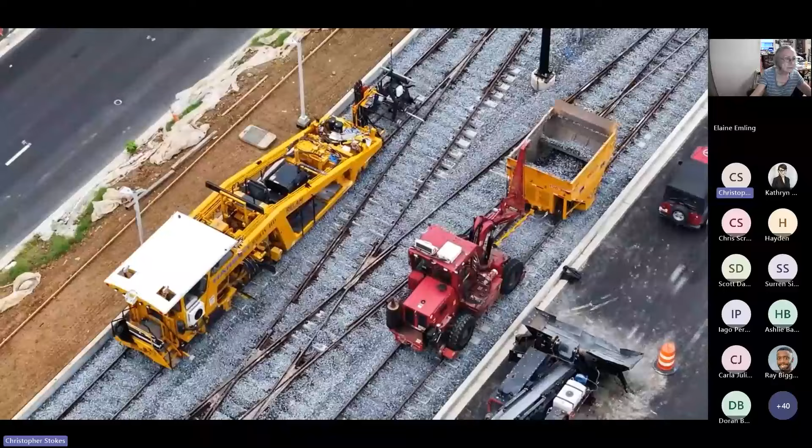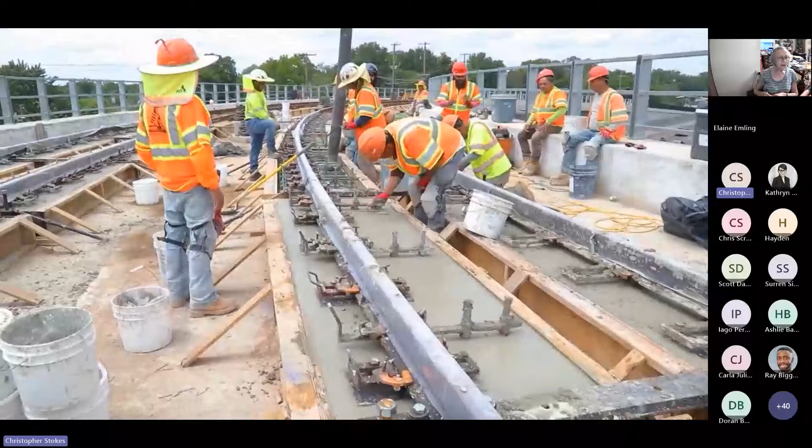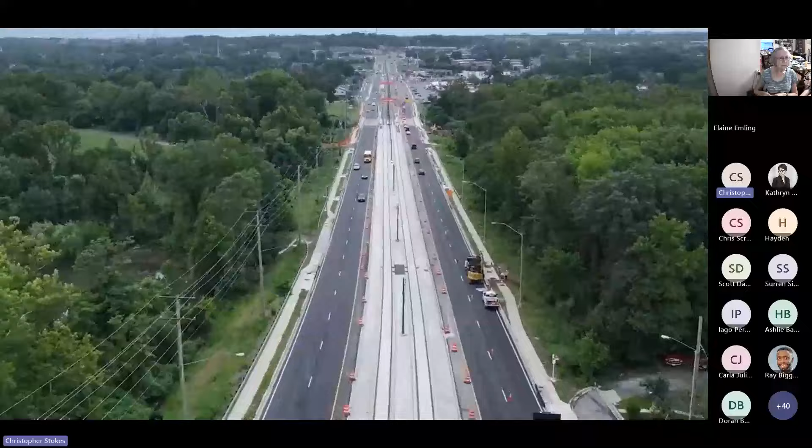It has truly been the year of transformation for the Purple Line project. With construction now more than 80% complete, the new Purple Line tracks tell the story. We are excited to share that tracks have been installed across all of Prince George's County, with more than 75% of tracks complete across the entire project.

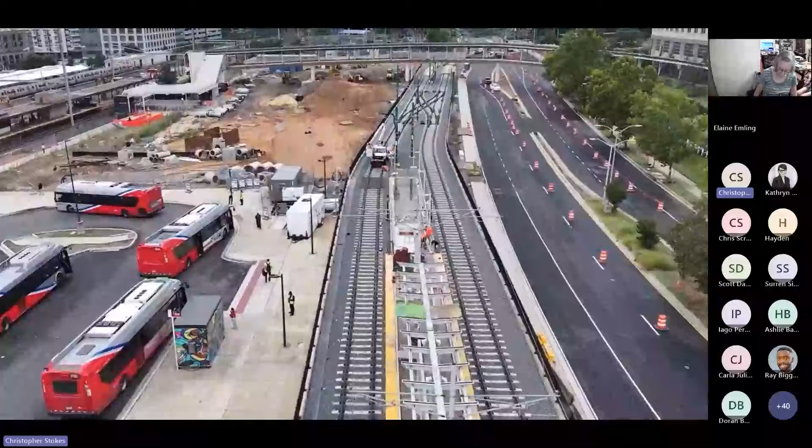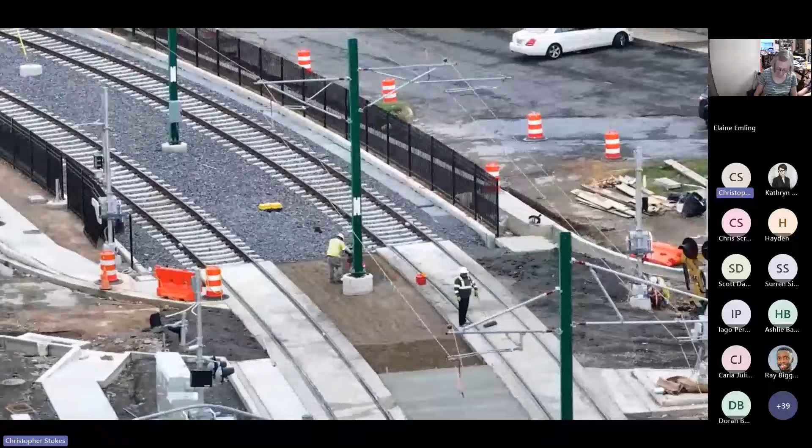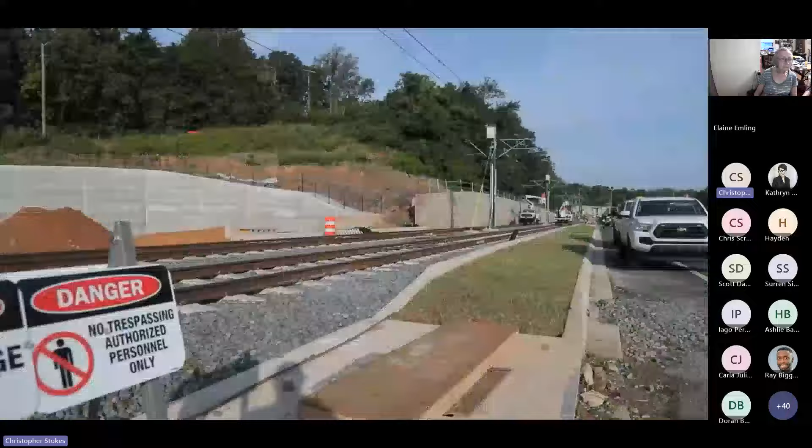Along with track installation, you have likely seen many overhead catenary system poles installed this year. These poles carry the wires that power the Purple Line. At the eastern end of the project, the poles and wires are not only installed, but have already been energized, ready to power up the light rail vehicles. Just a reminder, always assume light rail system power is on. And please be sure to avoid the Purple Line right-of-way areas. Only cross at designated areas and crosswalks, and be sure to look both ways before you cross.

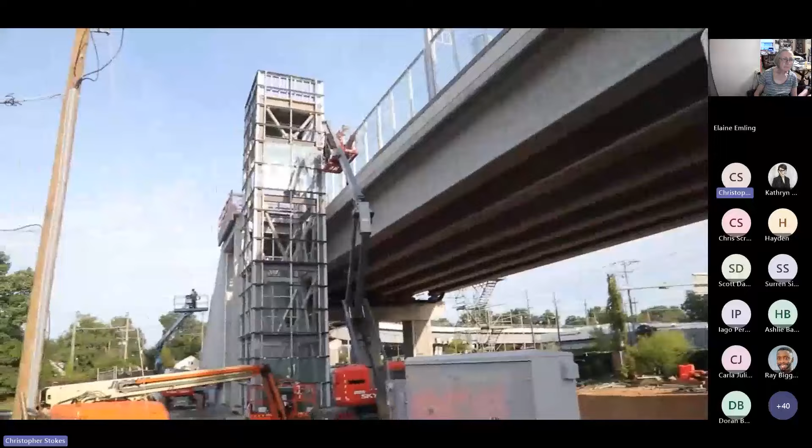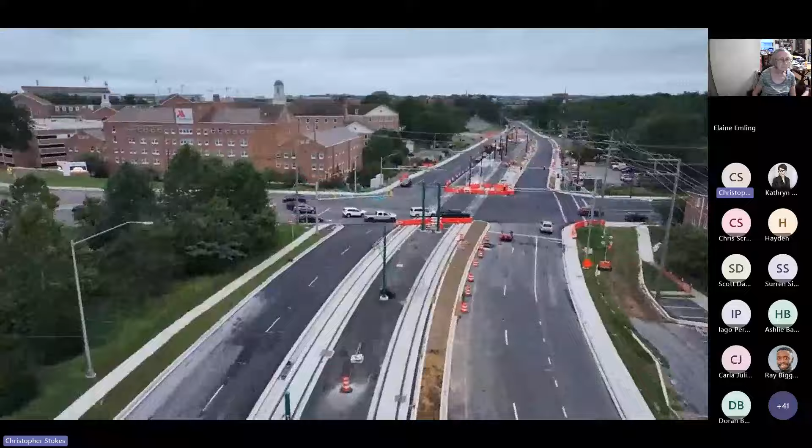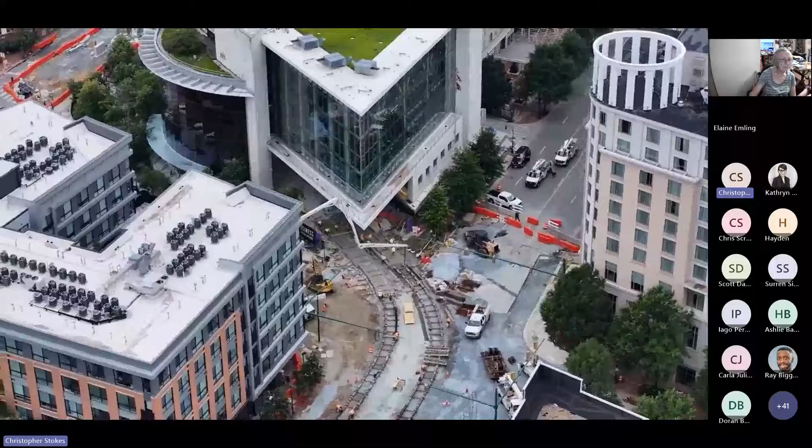Across the corridor, stations continue to progress. Canopies, benches, and Art-in-Transit installations are being added. Bronze spires in Riverdale, vibrant colors in Long Branch, and more to come. More than 20 roadway crossings that once required detours are now in their completed phase, including the complex intersection of Wayne Avenue and Fenton Street. With the tracks in place, Silver Spring residents can see the vision of a more connected community becoming reality.

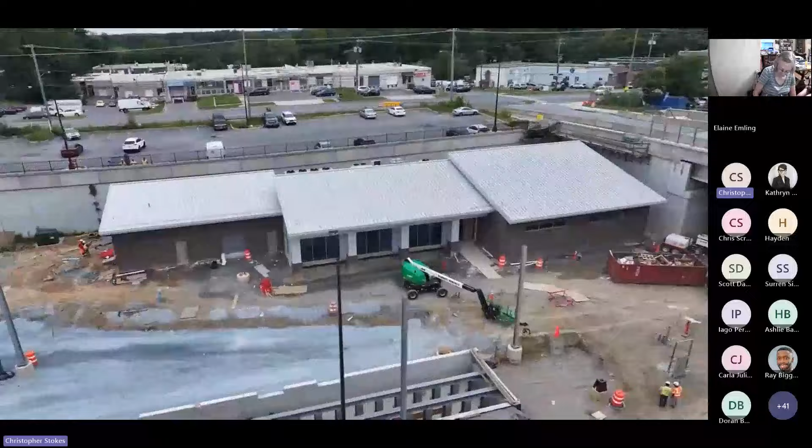In Lyttonsville, the second operations and maintenance facility is taking shape. This building and track yard will support the light rail vehicles with an additional control and communications facility and a smaller maintenance facility located in Montgomery County. Another major milestone is the completion of blasting in Bethesda.

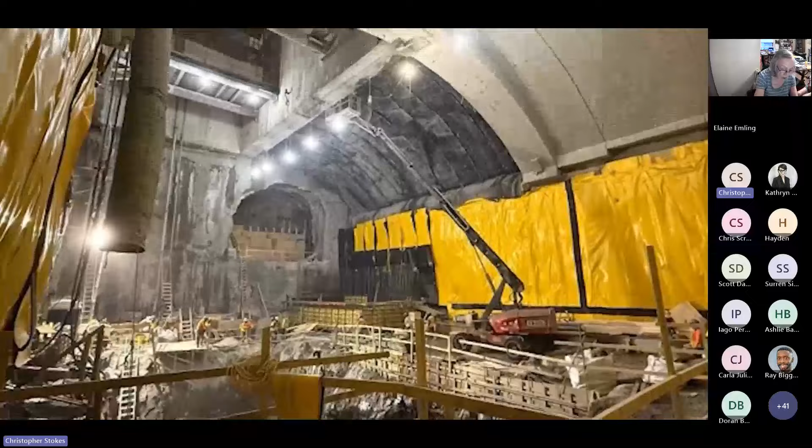After years of excavation, the shaft and cavern, located nearly 150 feet, or about 15 stories underground, is finished. Crews are now focused on waterproofing and concrete work, building out the cavern and elevator spaces.

Perhaps most exciting during our year of transformation, dynamic testing of the Purple Line has begun. Light rail vehicles are running during nighttime hours between the Glen Ridge Operations and Maintenance Facility and New Carrollton. The vehicles and track systems undergo rigorous checks of safety, operational, and communications. With New Carrollton testing underway, it won't be long before testing expands westward along more sections of the Purple Line.

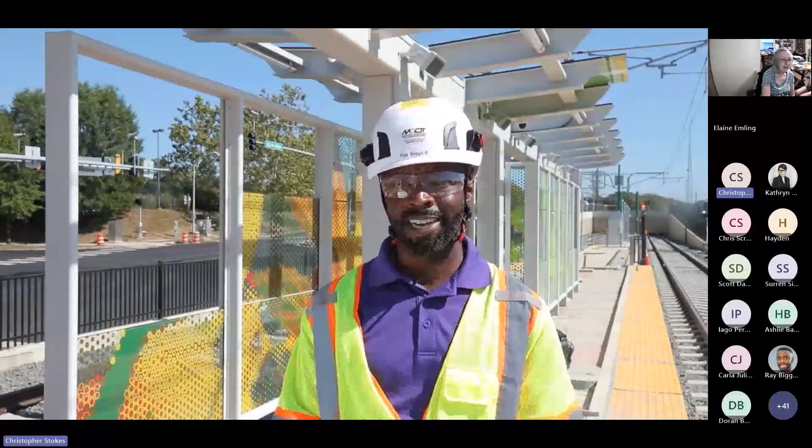Seeing a Purple Line light rail vehicle arrive at the first of our 21 stations is an exciting reminder of the hard work and dedication all of our teams bring every day to complete this transformative project. Thank you for your support, patience, and engagement over this past year. We at Maryland's Purple Line are looking forward to coming to a station near you soon.

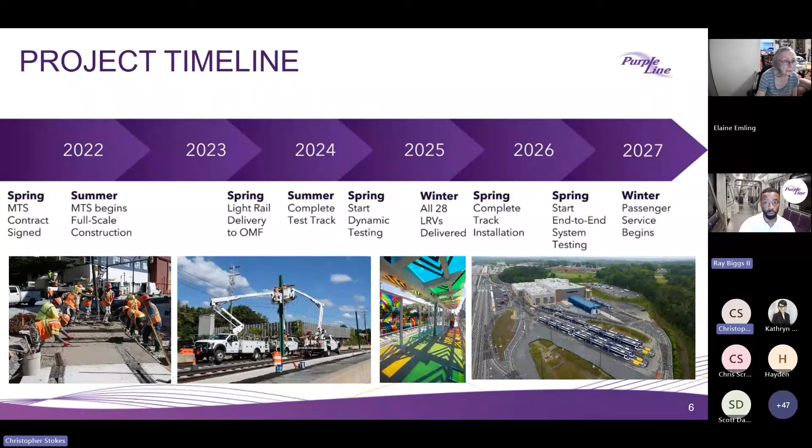Thank you, Ray. All right, we're going to start on the west side of the project, on the western portal of Manchester Place Station. We have been continuing with the stormwater management structure on the top of the station, and the construction of the retaining walls on the outside of the station portal.

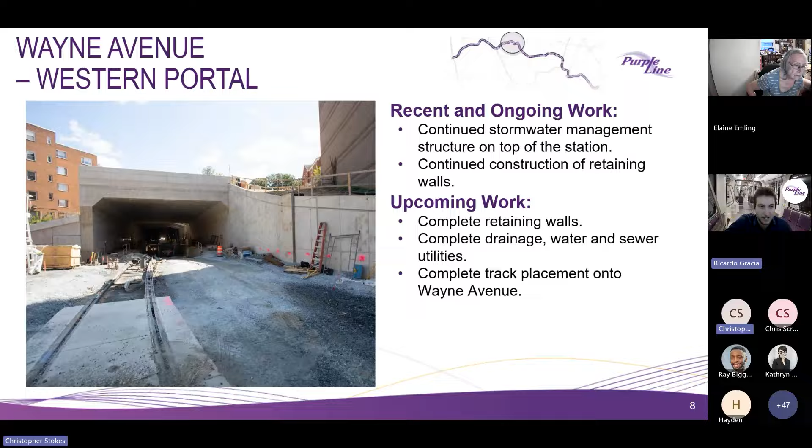Upcoming work includes some retaining walls on the upper area in the plaza level of the station, the last portion of the drainage and sewer utilities, and the track placement onto Wayne Avenue, the last portion of the curve.

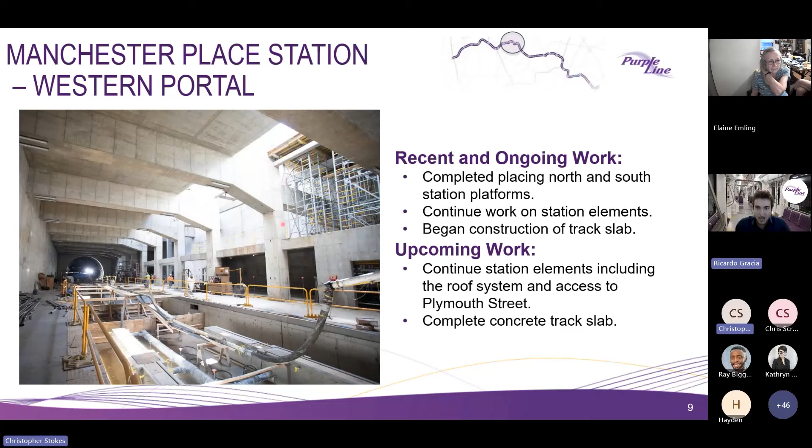Inside the station, we have completed the placement of concrete on the north and south platform. Also, we have been working on multiple station elements, such as stair landings and masonry walls, etc. We began construction of the track slab. Upcoming works are more station elements, especially in the roof and the access to Plymouth Street, and finishing the track slab.

Inside the tunnel, there has been a lot completed lately, including the ventilation system, the duct bank, and the walkways on the eastern portal, and the anchors that will support the overhead catenary systems. The track throughout the tunnel is in progress, not completed yet, and we continue with the installation of the overhead utilities through the tunnel. Upcoming work is the completion of the overhead catenary system and the track installation throughout the tunnel.

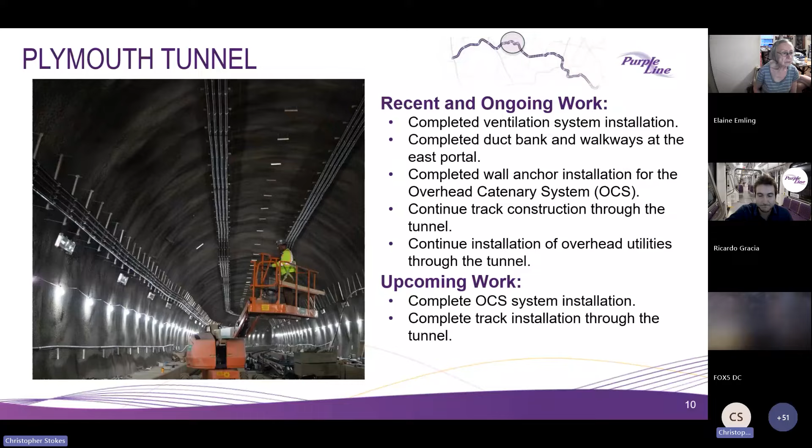On Arliss Street, we have completed all the walls along Arliss Street and Long Branch apartments. We continue working on the curbs and sidewalks on Arliss Street between Garland and Piney Branch, and we are continuing working on the concrete track slabs.

Coming up, we have the opening of the intersection at Arliss Street and the shopping center, installing the remaining OCS poles and overhead wires, finishing the curb and sidewalks along Arliss Street, and construction of a wall right at the end, at the corner of Arliss Street and Piney Branch.

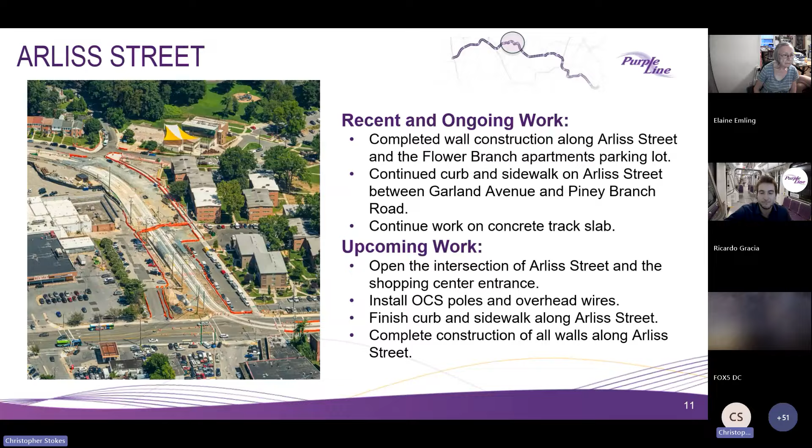At Long Branch Station, we have completed the platforms and canopy installation, and also finished the embedded tracks throughout the station. Upcoming work includes some more finishes on the station elements, installation of the systems that will run the trains, and some poles and the catenary system.

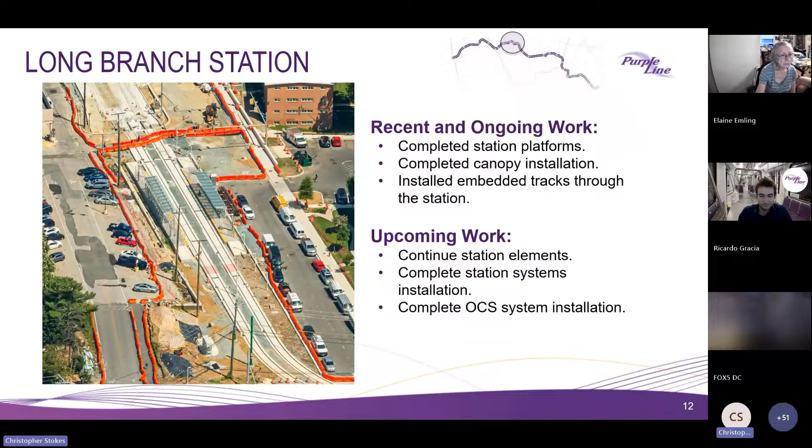I pass it to you, Iago. Thank you, Ricardo. This is Piney Branch Road.

The most recent work is related to the completion of the stormwater system. We also completed the installation of the curb and new sidewalks, the track and the OCS pole installation, and more recently the new entrance for the Long Branch Community Center, including the new sign we can see in the picture. Months ago, we also completed the intersection of Piney Branch Road with Garland Avenue, and also the Long Branch stream restoration.

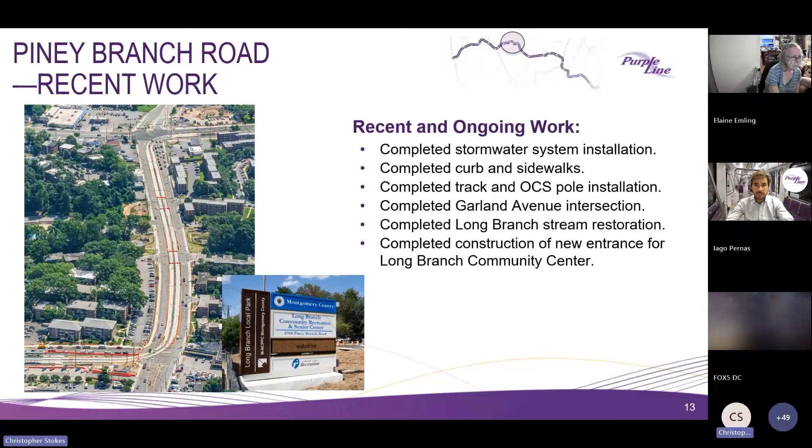As upcoming work, the plan we have here is to complete the final paving. The target is to try to make this happen before the end of the year. However, this operation is linked to the temperatures. If we don't have temperatures at the end of the year, this is going to happen first thing in the new year, right after winter. In addition, we are going to complete the new signalized intersection between Greenwood Avenue and Piney Branch Road, and we are going to complete the installation of the OCS wire and systems in parallel with the installation of all the roadway signage on this road.

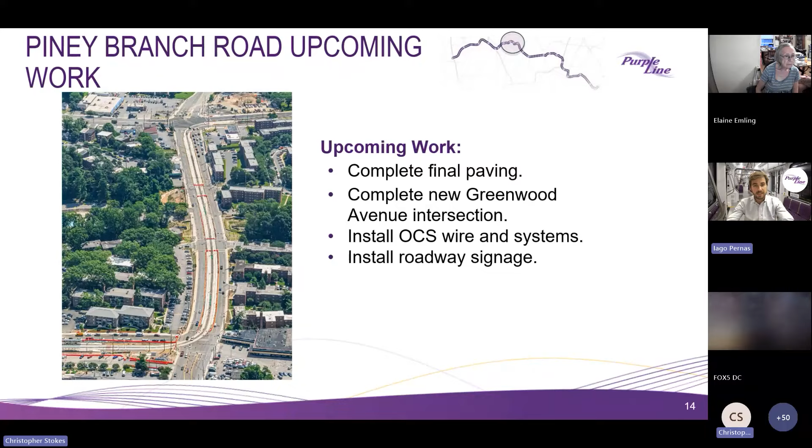Now Ricardo is going to talk to you again about the upcoming traffic switches in this area. Thank you, Iago.

As of September 22, 2025, we did the shutdown of the south side of the Sligo intersection, which means Sligo Parkway remains temporarily closed between Wayne Avenue and Piney Branch. The expected time frame for this closure is 2 months, so we will be opening on or around November 22nd. The trail remains open, and vehicles are being detoured by Piney Branch.

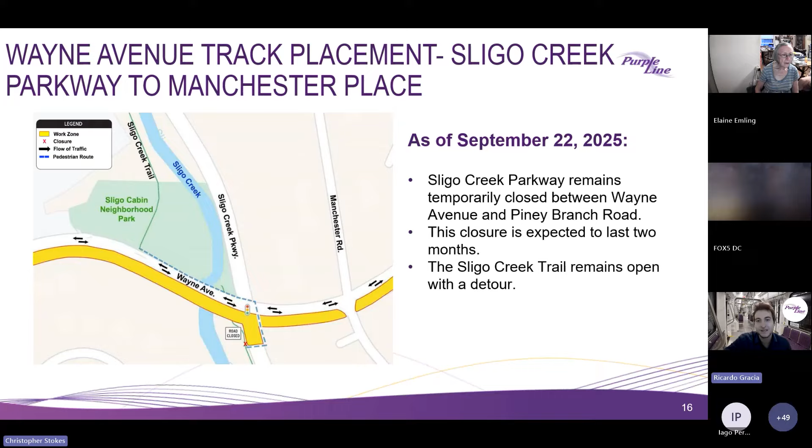The vehicles that need to go to Piney Branch are being detoured through Manchester Road, and the vehicles that need to go from Piney to Sligo are being detoured through Flower Avenue back into Wayne Avenue and Sligo Parkway going north.

As I was saying, this closure is expected to last 2 months. So far, everything is going well, so we don't foresee any delays.

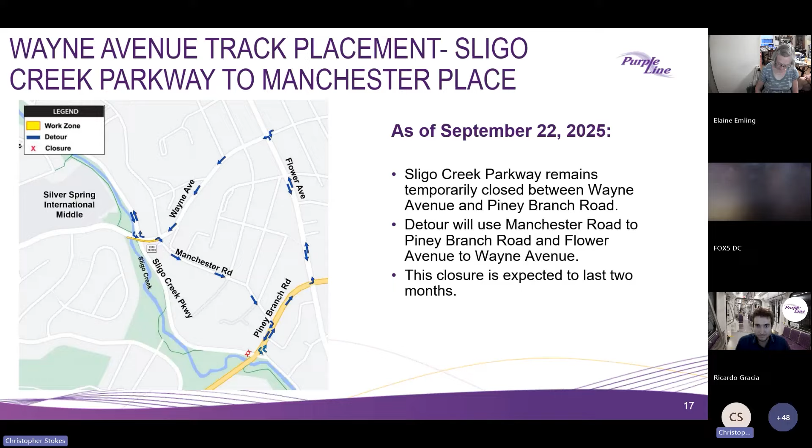Thank you, Ricardo and Iago, for that detailed update on the construction throughout this segment of the alignment. Surren will now provide a systems and testing update for you all. So Surren, over to you.

Thank you, Chris. Hello, everyone. I'm going to spend a few minutes talking about our test activities, ongoing and upcoming, and what better way to start than with a short video that highlights what we've been doing so far in the area of testing.

Welcome to the Purple Line. Next stop, New Carrollton.

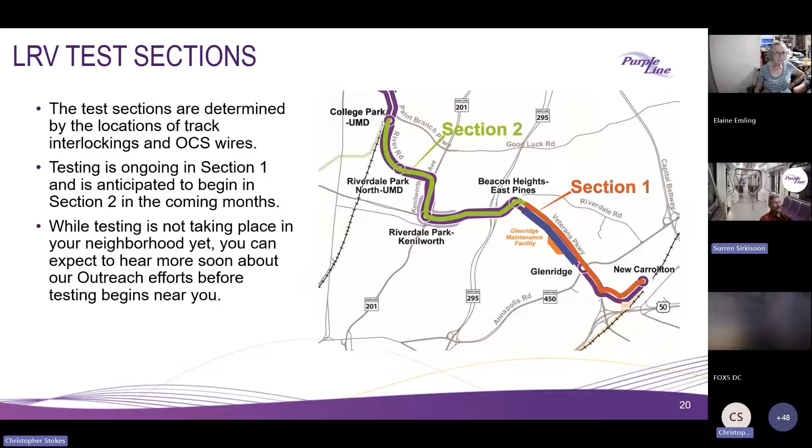What to expect during testing? A major part of our test planning and our test activities is maintenance of traffic. Until the traffic control systems are operational, our maintenance of traffic crews will control intersections in the test areas. That control will be performed by uniformed police officers and flaggers. There will be intermittent traffic stops and road closings, and we are currently implementing these measures in our first test section. Some of you may have seen some of our activities during the nighttime period.

Specific maintenance of traffic protocols are developed for each test section, depending on the intersections, the activities, and the facilities. For example, special MOTs will take place in the university area as well as in busy parkway areas. Hours of testing for what we call dynamic testing, with trains going through intersections, are currently happening between the hours of 9 p.m. and 5 a.m., and this will continue through 2025 and beyond.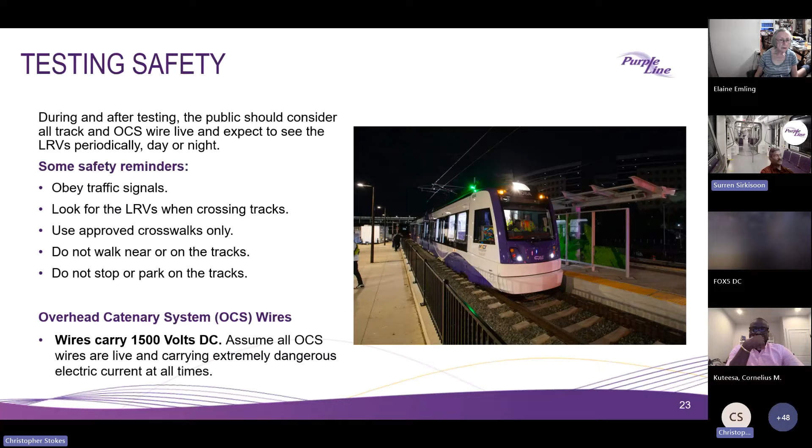That's a short synopsis of our test activities. As we get closer to testing in your areas, we will expand more and give you more information on those test activities.

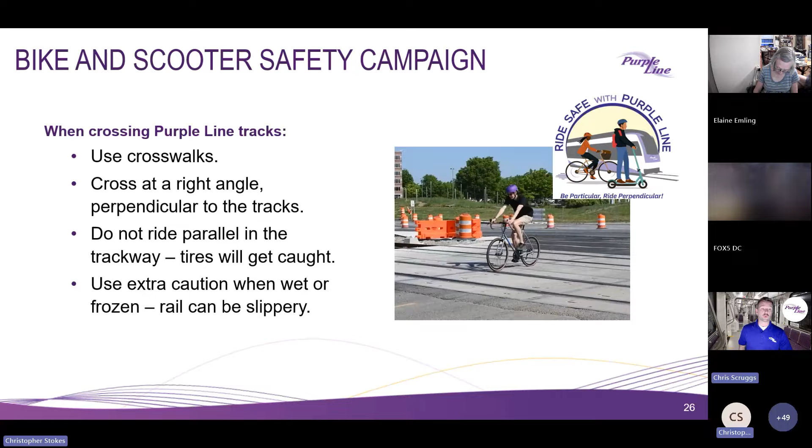Speaking of University of Maryland, this is a bike and scooter safety campaign originally rolled out on the University of Maryland campus, now being rolled out across the alignment as we get closer to testing and opening, to make everyone aware of how to cross tracks safely. When crossing Purple Line tracks, use crosswalks, cross at a right angle perpendicular to the tracks as pictured. Do not ride parallel on the trackway, as tires can get caught, and use extra caution when the track is wet or frozen, as rail can be slippery.

Over the past couple months and throughout this year, based on feedback, CAT members were contacted earlier in 2025 about continued interest in service with their CAT member relationship with the Purple Line, as well as different engagement ideas. Outreach started last month and continues this month with individualized phone calls to CAT members along the alignment, and will soon reintroduce biannual CAT member listening sessions to have another space to engage with community members.

Outreach broadened distribution efforts for this fall series of CAT meetings to include community centers, libraries, and coffee shops. After the spring series of CAT meetings, Outreach implemented feedback from a post-CAT meeting survey, and you can expect to receive a post-CAT meeting survey in the coming weeks.

I will pass this over to Doran to talk through Beyond the Rails grants. Thanks, Chris. Another way we interact with the community is through Purple Line Transit Partners' Beyond the Rails Community Grant Program. The aim of this program is to support nonprofit community organizations by providing additional funding for them to pursue their mission.